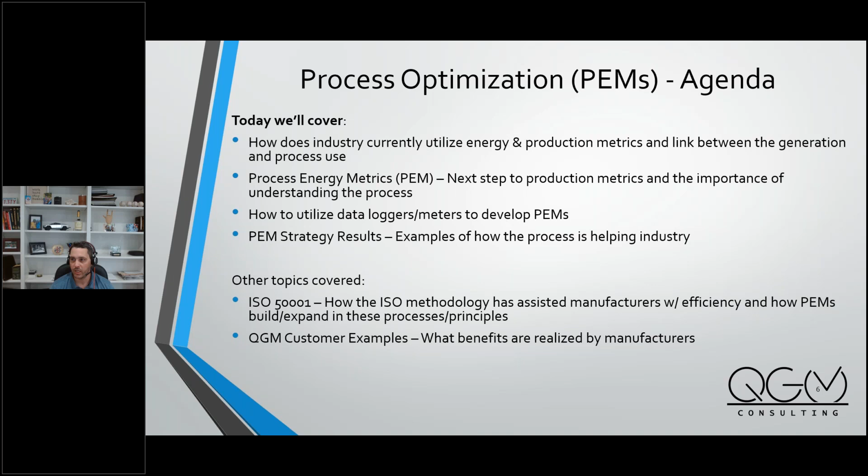So that's QGM, and now for a real brief agenda. How does the industry currently utilize energy and production metrics, and what's the general link between the generation of energy and the actual process use? We're going to really highlight the production or process energy metrics, we really feel it's the next step to optimize production and understand your process. And then, how do we utilize data loggers and meters to develop these PEMs? We'll go through a few examples, strategies and results that we've gone through over the past few years. A lot of these topics are closely related to ISO 50001, Justin's an expert in that, and we'll be able to see how ISO 50001 incorporates into the PEMs. So I'm going to kick it right over to Justin, he's going to dive in, and I'll be back a little bit later.

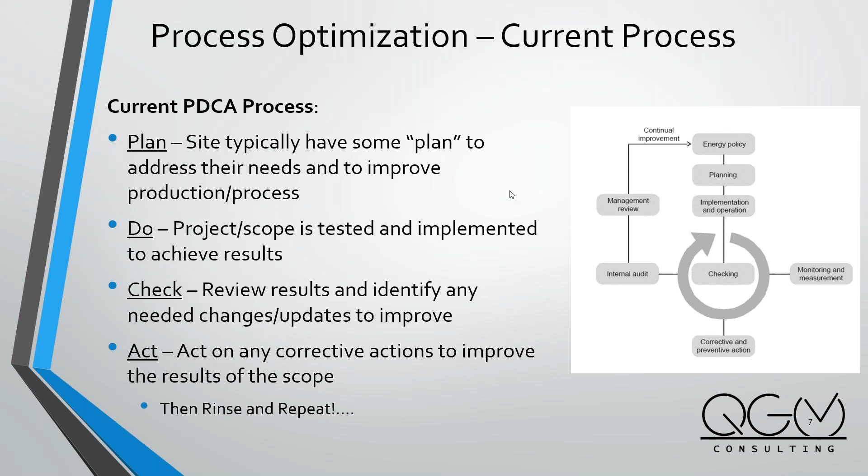So when we do planning, we want to have that do, check, act in mind. As we do that, the monitoring is critical. The quicker you can get feedback, the quicker you can analyze exactly what occurred, understand if there's any deficiencies, and go after those loose ends to make your process more effective, more efficient, more profitable.

To kick into what's typically happening now, sites will identify what we call significant energy users. A very good place to start. We try to figure out what is the most intensive operation, and a lot of that involves systems like boilers, chillers, compressed air, you name it.

But what we started finding out is, as we look at that high level building approach, the SEUs, or all these significant energy users, typically can touch many different processes. We wanted to dive into that more, and we found that we're getting a lot of traction as we go into this type of process.

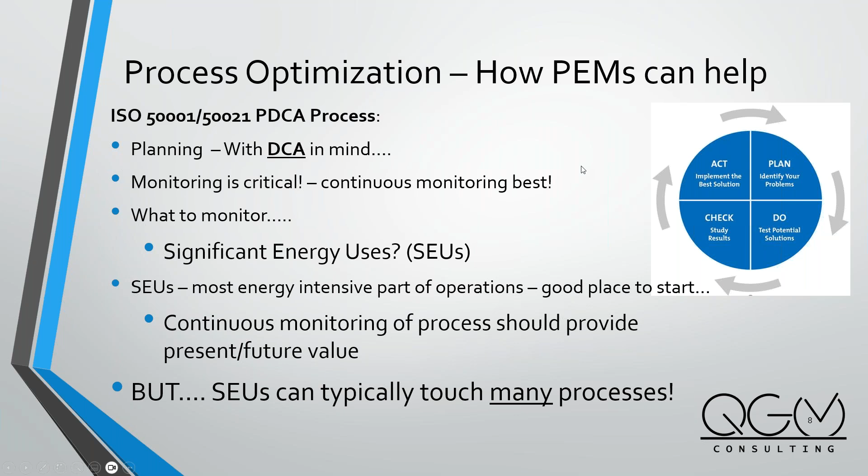So how does ISO 50001 play into this? Well, a lot of people are looking at that as a standard, essentially, to understand how to benchmark where they are, to show improvements and gains through an accredited organization, as ISO is involved in many other things with quality and that nature.

So what they've done is they have what they call energy performance indicators. A lot of times what we do is we normalize all energy to BTUs or whatever we may want to label them, and essentially start comparing them to production and other metrics.

But a lot of times what we've noticed is there are many different processes or widgets being made under the roof of some of these facilities, and we needed to get into more of a deep dive.

So as we went through with the efficiency goals, and understanding where folks wanted to go, typically it's a 5, 10, 15% reduction that people are looking to achieve year after year.

We started realizing that this energy performance indicator tool, although it's a great way to get started, there was more detail that folks wanted to get involved with. And as we got involved with those details, more results started coming and realizing themselves.

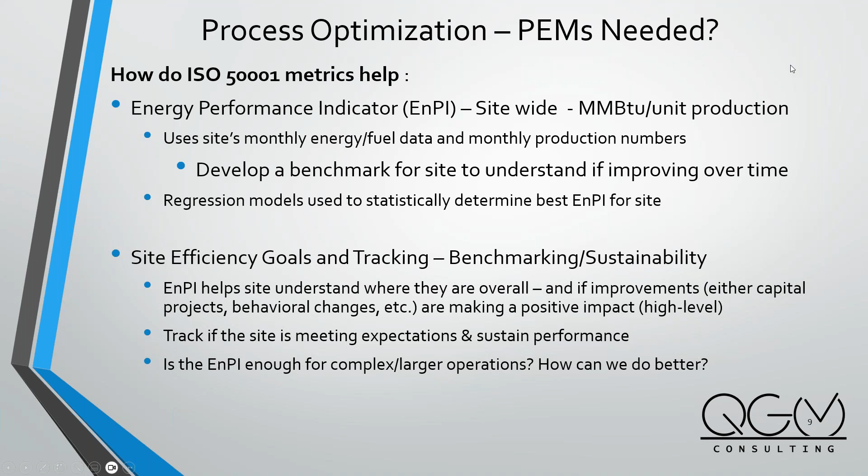So we wanted to say, how can we do better? And this is where we want to discuss some of the PEM stuff with you.

So again, this is just a quick look at the ENPI process tool. Just to go over it, not to beat a dead horse, but the concerns here were high level, not specific enough. Everyone can say, well, I bought a VFD air compressor, hey, the chiller's got a VFD, the pumps and all of that, we got some controls on it.

But what we found is what is actually happening as we make the widget. So this really only addressed generation, it doesn't really look at what's being utilized to change the form, fit, or function of any of these products.

As well, it takes time to develop and track these. It's basically on a monthly basis. And what happens is things could happen and you don't catch them for maybe a month or two.

So as we go through this, we started realizing with all of that happening, after two months you realize there may be a concern. There's so many variables now built into this tool that it was tough to really pinpoint where to get started to make additional improvements or correct some of the results that we were seeing.

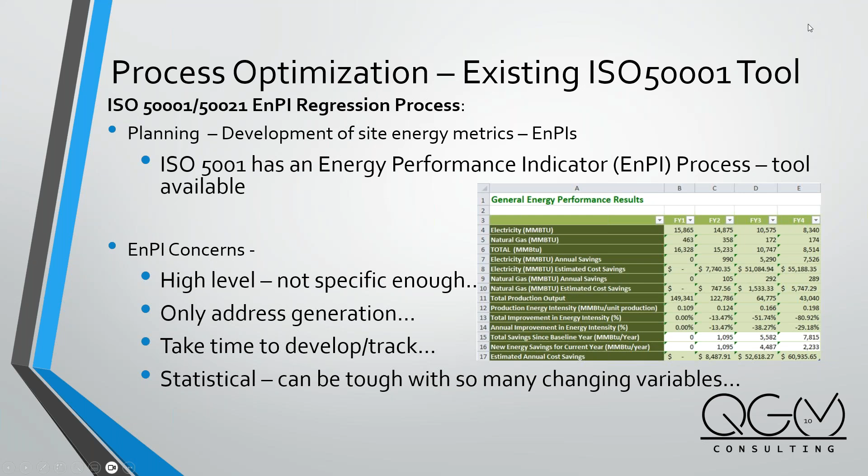So PEMs and EnPIs. Like I said, an energy performance indicator is something developed by ISO to talk about the entire site and how that site's energy relates to just quantity of widgets, could be pounds, could be linear foot of what they're making. You could slice and dice this many ways.

But what we learned is that we needed to get to that next step and look at what happens as we dive deep into an actual specific manufacturing line. So the next layer, after understanding the site and showing that we have some correlation, is to get more specific metrics related to the individual lines.

As we found, as we go around, sites typically do not understand the energy intensity for the products. That started becoming a question of what product is actually consuming the most as they go out for new contracts and things of that nature. They know labor and intensity of things, but what do these utilities actually mean to each product they make, and are they charging appropriately enough?

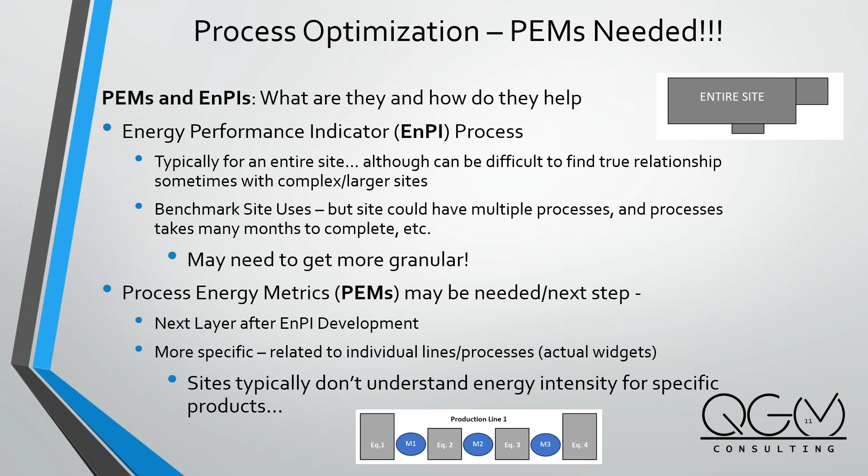So why are these PEMs needed? As we said, it's tough to track things. As you see, we have our general layout of site demand: you got some pumps, some chillers, fans, air compressors. It's easy to start measuring each one to go, hey, here's what this consumes with regards to your overall usage of the site.

And the pie chart has always been a great way for us to understand what's happening at a site, so that we spend our efforts where the energy is most intensive, and also not only where it's intensive, but where we can make the most impact.

So what ended up occurring was we started figuring out, let's get into—and I'll give credit to one of my old professors—he would always say, we got to know the gazintas and gazoutas. As an engineer, we like to create a boundary. What we would do is just draw a control volume around a production line: what is coming in for raw material, what comes out, and at the end of the day, what's going in.

So when we started getting into these, we understood this was valuable information. We've learned as we dive into understanding what's happening at specific lines, specific equipment, operations, and widgets being created, the conversation with the customer really took a different approach.

They really were engaged, meaning they look at a big air compressor and just go, I don't know, you tell me if it's working well. When you start telling them how much they're using for air, chilled water, to make each product, they start going, well, I'm not sure if that makes sense, or that's interesting—I didn't realize that was happening.

And before you know it, you're planting the seed to help people understand where there's intensity, and then whether it's jiving with what they would expect with regards to the process line they've ultimately been running for many different years at this point, right?

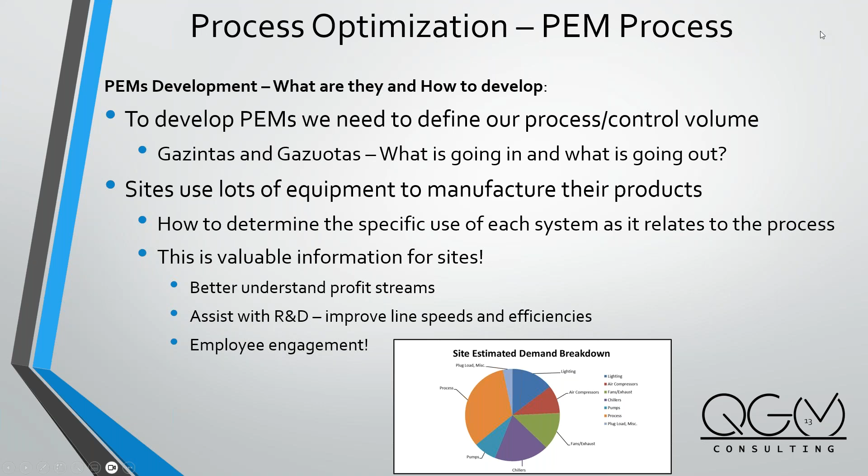So the gazintas and gazuotas, how do we actually approach, address, and go after this? As I spoke about on the other slide, we draw this control volume, let's draw the boundaries of this process line. We need to understand what is being consumed. Is there compressed air? There can be chilled water. Many motors, fans, pumps that either are inside the control volume or being fed outside the control volume, depends how you want to draw your dotted line.

There can be heat. We've got many other sources with direct fired equipment, steam. I mean, you name it, we've seen it. There's almost too much to list, but understanding what's being consumed will help us know the intensity.

Then we have to look at what's being produced. And that's been looked at many different ways with regards to either pounds of material, length of material, volume of material. As well, we can start getting into scrap and waste and other things.

And I'm sure, as you can realize, if we know how much energy is being consumed and how much is being made, we can put a value to what that scrap, what all of those inefficiencies are worth. And a lot of times that's what we use to talk with customers to say, is this enough of a carrot to help us go to the next step to actually make any changes and improvements?

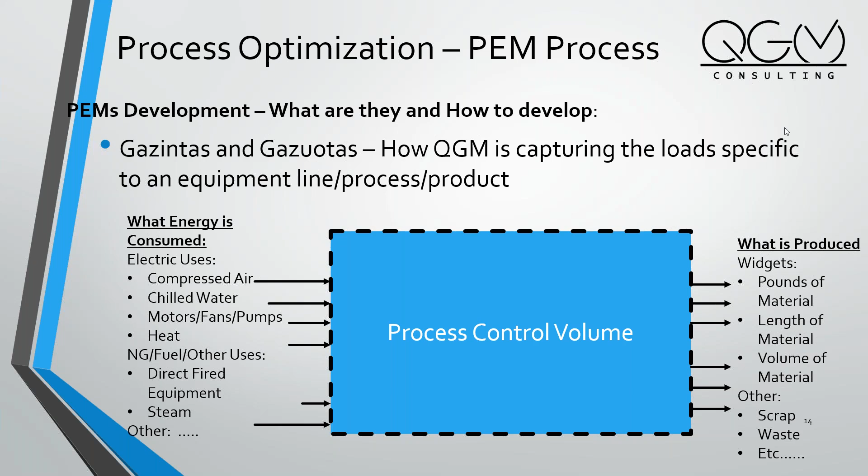All right, thanks Justin. I'm going to take over for a little bit here on the gazintas and how we collect the data. So first, what do we want to data log? What variables do we need to monitor? For how long do we need to monitor it? And what interval?

If you get a reading every 1 minute, a lot can change in a process in a minute, right? So that's the reason why we do like hobo loggers. They can go down to 1 second intervals for up to, I think, 3 months or more. So it's very important to understand those three criteria.

And then all the different types of monitoring equipment that we use is very broad. Whether it's just electricity, could be compressed airflow, straight power, pressure, temperature is big. So getting delta T's across a heat exchanger, for example. And we can utilize a lot of the hobo loggers and equipment to do this.

And I think that's why we've been successful, is we're very good at collecting the data and then presenting the data and letting the data speak for itself. Once customers see the data, it typically opens their eyes and says, oh wow, okay, let's work on that, or let's focus on this, or how can we make that better?

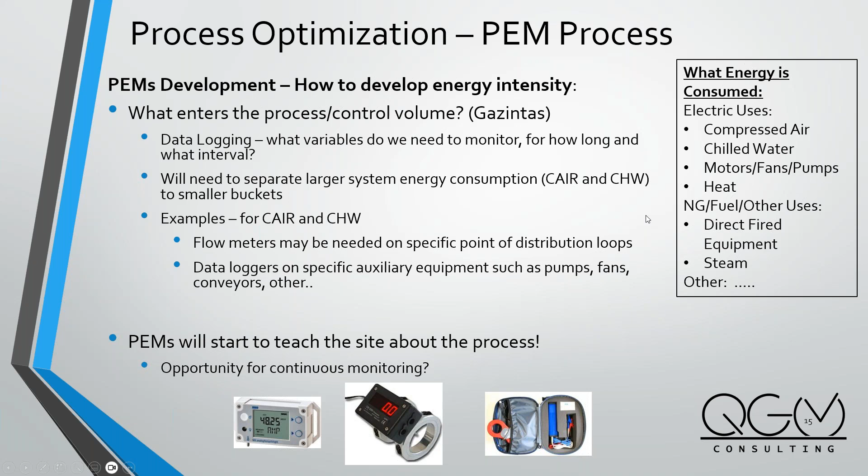So the gazintas is very important. Obviously, that's how we baseline the energy use, or the fuel, steam, all that. So here's some highlights of some of the data loggers we use from Hobo.

Like I said, what to monitor, how long. We like Hobo because it's easy to use, very easy to deploy. They have a nice software for analysis. And most recently, we've really enjoyed working with HoboLink, it's their cloud monitoring system.

So you simply need a gateway and an internet source, and then it can all go to the cloud, and you can see it near real time and actually download the data remotely. So we can do our auditing in almost half the time without going to the site. And this is part of the real time constant monitoring - you can make a change, look at the data, and see what happens.

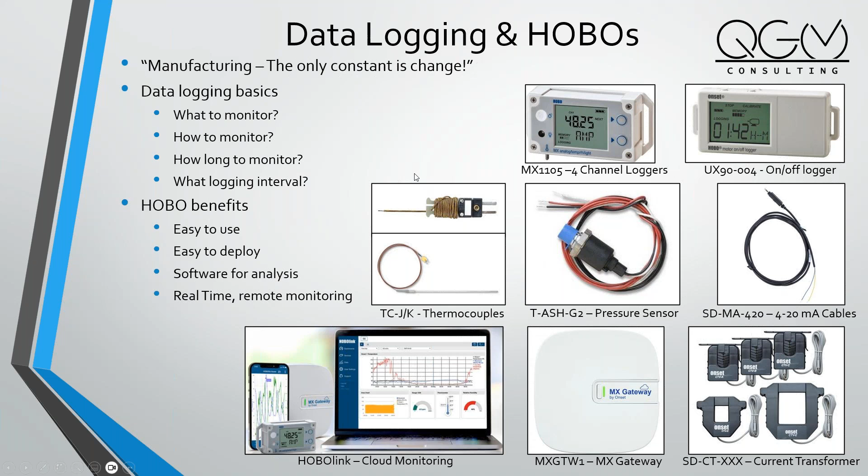I don't have to go through most of these, but we use motor on/off, pressure sensors, thermocouples, obviously current transformers, 4 to 20 milliamp output cables, and 0 to 5 volt is very useful on some applications, but there's a wide range that we can use.

So obviously, safety is key when you're installing these and it should be done by a licensed professional.

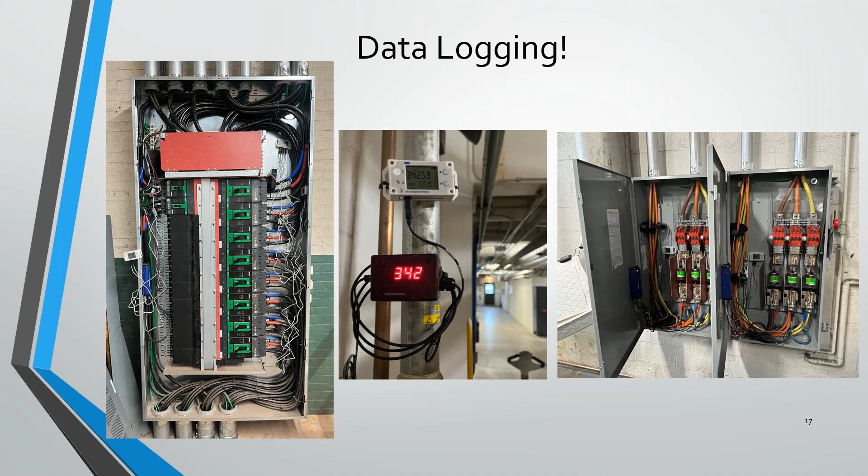So defining the widget is critical, obviously. That takes discussions with the facility, and this isn't some of the first items that we go over when we're in the plant. We don't say, hey, how much volume of metal do you guys make. This is after we've had some history with the customer - they trust us, we've been in there working with them, but they're more open to giving us some of their data.

So quantity, it could be jars, cases, bottles. Obviously, if you're a bottling plant, you know how many bottles you make, right? Volume of material, length. But defining that widget is critical, and it could be widgets per line, individual widgets. But that is all the first step.

Also important is scrap rates. Those consume energy and rework time, obviously. What other byproducts can come out of that? Is there a waste stream that you can sell for a byproduct? And then other energy losses - is there just significant waste heat going out the stack? Condensate going to drain where it's not being recovered?

So customers really were interested when we started monitoring the compressors and chillers, and they said, well, I wonder what line one is costing me for energy, because I really need to know for pricing, and I just want to know how much energy is going to that line. So we started looking at line one versus line two versus line three, and once we get the data, it's, oh, why does line one and line four use twice or three times more energy than line two? And maybe line two and three are newer processes and newer equipment.

So we're almost detectives, right? And we're trying to find out where the energy is going, why it's being used, and when, and if it could be improved, changed, or optimized.

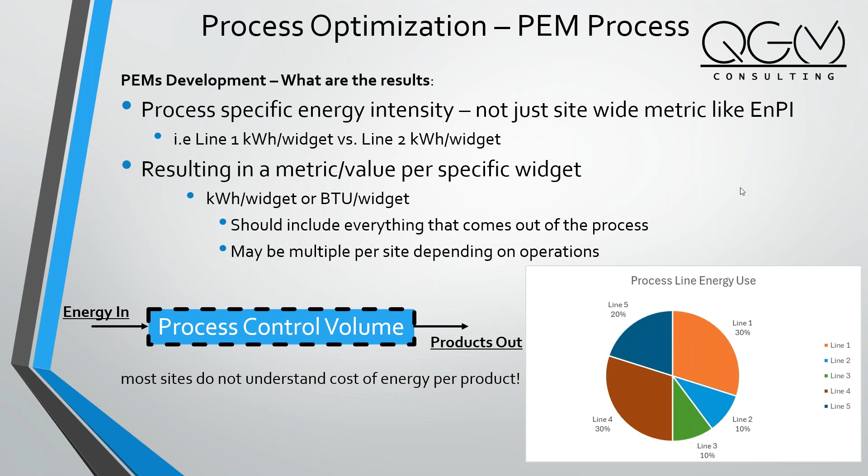And I'm going to kick it back to Justin for some examples. Oh, thanks, Alex. So, where have we been able to make some improvements? I'm sure everyone's a little curious. So as we go through, there's a variety of different ways.

I'm sure you can imagine no specific process is identical to another. Even if they make the same thing, I've been to plants that exist 15 minutes away from one another, making the same product, and it's different. If they were choosing to make it the same way, one would have overtaken the other, is what I kind of have come to the realization.

So you realize that everyone's got some sort of proprietariness to this. And as Alex said, part of this is gaining trust with the customer over years of relationships, of looking at the other systems and letting them know that the data is accurate, the data is real, the loggers work. How can we use these to help you out?

And a lot of times it comes down to an oh boy, oh no moment where, I don't know, something happened. We get a call and we come down. And this is an interesting example here where we started working with a new site, that literally brand new site.

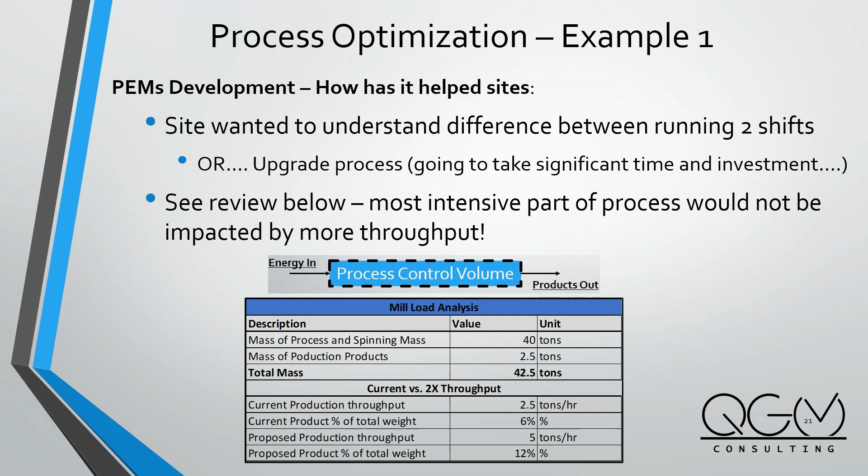So just to let everyone know, we had air compressor energy, big process motors, blowers, fans, dryers, you name it. Really what we see is the big intensive portion was the actual running of those process motors. We can see here we have the existing operation on the left, which is what they were getting done, and we have an energy intensity there of almost about 0.1 kWh per pound of product.

When we run additional hours, they could double how much they're making, but again they were at the same energy metric. So as we started looking, we said, well, what's the percent increase expected? The compressors, the blowers, the fans, they needed to all run significantly more, but they weren't really the main driver of this process. What was the main driver? Process motors. That's where it was only a 5% increase overall to actually achieve what they needed to.

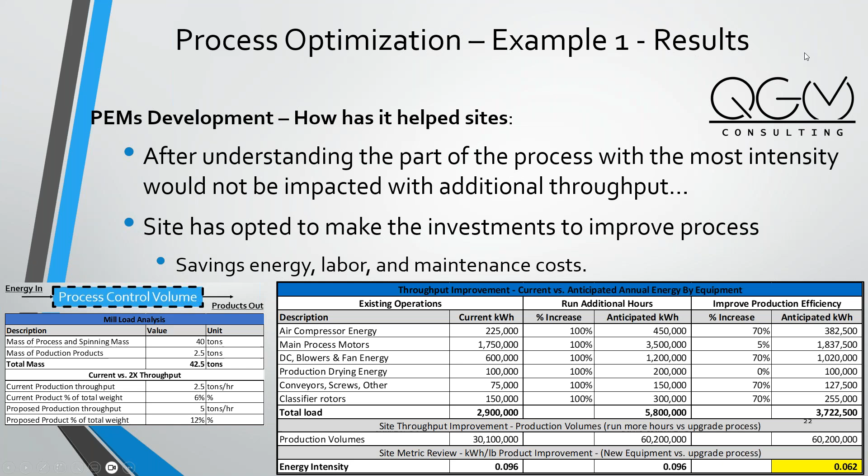As you can see, we were able to improve their metric by about 30% reduction. So they were able to make all of this product, not have to run 2 shifts, hire new staff, and all the other things that aren't even factored into this. And again, make huge gains as their industry was growing.

Some of the other things we've looked at — it's interesting, we went through this and got a few customers excited to potentially make changes. I will admit the insurance companies came and kind of put a stop to it due to concerns with electric heaters.

But we had a lot of customers that use steam to heat water tanks, and this was basically specific to the plating industry. As we went in, we realized we're running lots of boilers, and we've got a lot of lines that need to be heated. Whether they need to be heated all the time is a different thing.

I'm sure you've seen on-demand hot water heaters, things of that nature. They essentially are better because they only use energy when they need to. When you get these big central systems, we're sending steam and everything everywhere, whether you need to or not. And that's kind of standard in industry, right?

So we looked at the difference between steam versus electric plating. As you can see on the left, we had just about 50 tanks, and when we look, the tanks are in operation a majority of the time for their single shift.

And we were able to figure out the BTU per tank per hour - essentially what the boilers feeding these lines were using, accounting for the lines and everything. They did have some electrically heated tanks as well, so we ran an analysis to understand it.

This one was interesting because there's slightly a cost increase to operating with electric heating. But what we learned is the BTUs really drop down - we almost cut them by 75 to 80%. Obviously electric cost per BTU can be 3-4x that of natural gas in some cases, so even with the efficiency we saw, you're seeing similar costs to operate the lines.

But when we look at the MMBTU savings, and especially the metric tons of CO2 that could have been saved, it was very much a driver and would be a driver for a number of customers.

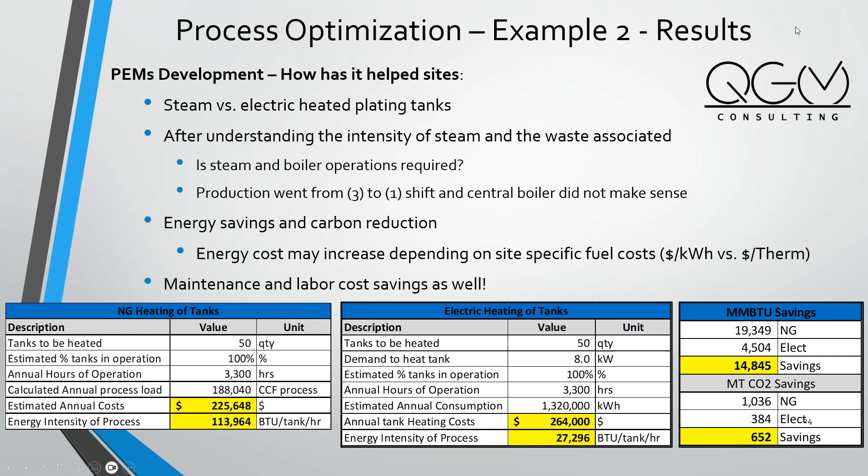I'll be transparent and admit what we found is that insurance companies were not too keen on having these electric heaters, as a number of plants have burnt down because of tanks basically being overheated - the water drains out and you get this element running that starts melting things and creates a hazard. Even with safeties, automatic fillers, and floats, we found viable solutions, but at the end of the day no one's willing to go against the insurance company. So I don't expect this to never come to light - I assume someone will find a better way to get it done. But for now, the insurance companies are the ones stopping those projects from moving forward, interesting enough.

So a third example, and this is a really big gain we helped one of our customers make. We've seen this at a number of different plants - this plant was actually willing to act and try to make the changes.

Again, we see these big horsepower boilers, 1,000+ horsepower, feeding tens of thousands of feet of steam piping that in some cases literally end up nowhere. Processes back in the day would just tap in and keep using more and more steam, creating this vast spider web network of steam distribution. And it doesn't matter how often you insulate or take advantage of it,

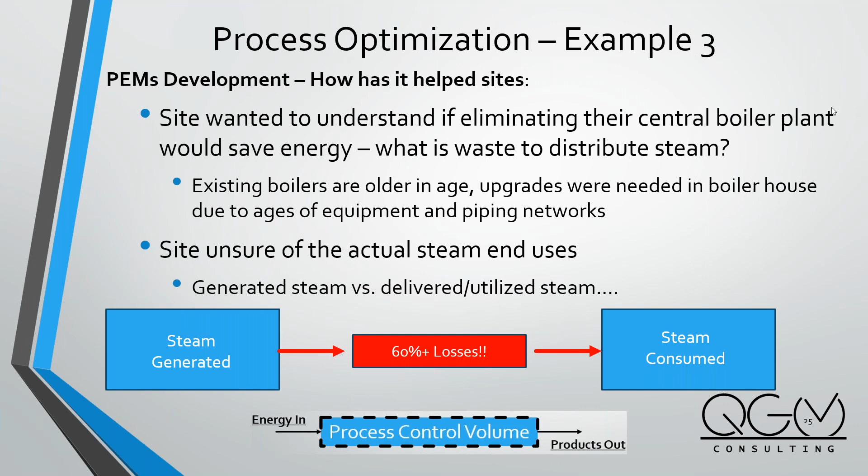it's basically a waste. What we were able to do is some savvy data logging with HOBO loggers on some condensate stations, and strategically repiping some things to really make sure we understood what we were going after. We worked to figure out what the boiler was using versus what the process was using.

And we found there were 60% losses essentially from the whole entire system. With the data loggers, we were able to trace where the natural gas was going - there was some heating, some process, and as you can see, the process was only 10% of the total usage. The rest of the energy was going to cooling, distribution, things like that. And you may say steam for cooling - well yeah, they had steam, so they just used absorbers and things of that nature, which made it even worse.

We were running these big boilers for really no reason. So instead of running thousands of horsepower of boiler, we got it down to about 530 horsepower systems essentially sitting around the plant feeding the specific lines. All the office heating and production heating went to direct fired style units fed by a natural gas line, which allowed us to only use energy when we needed to. They ended up saving 50% of their actual total gas use, which was a lot, as you can imagine, coming from a 1,000 horsepower system.

So other examples, like we said, involve reviewing these central systems - do they make sense? A lot of times we're finding there are better ways to allocate energy end uses so we can shut them off when needed. Back in the day we had more booming 2-3 shift operations, and this isn't meant to shut things off for 4-6 hours at a time, but on weekends. Some of these metrics actually force our customers to understand how they're going to process workflow.

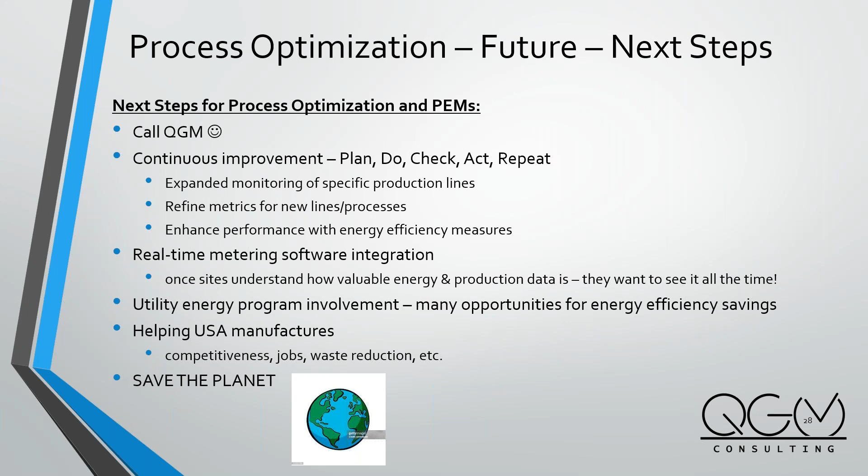Like I was saying, utilities specifically in the New England region have great programs, and there are many more across the United States, and this data logging allows you to identify many opportunities for energy efficiency and savings. We love it. It's helping the USA manufacturers. It's adding competitiveness, jobs, and reducing waste, and we're saving the planet, right? So that's what we're all here for, right?

So some conclusions, key takeaways. For larger sites, more intricate processes, we may require an additional review after the ISO 50001 significant energy users in the ENPI process, and that's where PEMS can come in. Again, this is new, and we're just starting to develop this with customers, but we're excited to be working on this right now.

It really gets the customers engaged and educates them on how much the process is using for energy. And it's important, so by helping the sites better understand the energy intensity, they become more aware, engaged, and it's a win-win overall.

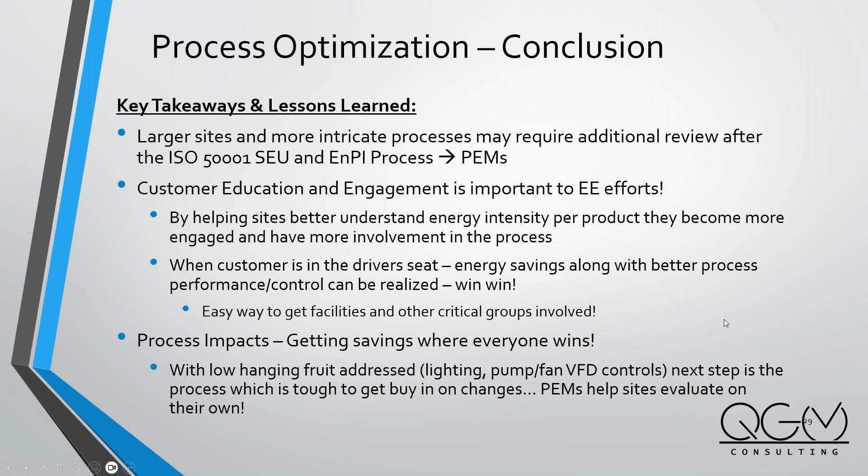Production and manufacturing really is, they're there to make a product, right? So whenever you can optimize how much product is getting out the door for cheaper, typically customers are on board. And this is really the start of it, because PEMS really help evaluate what that is.

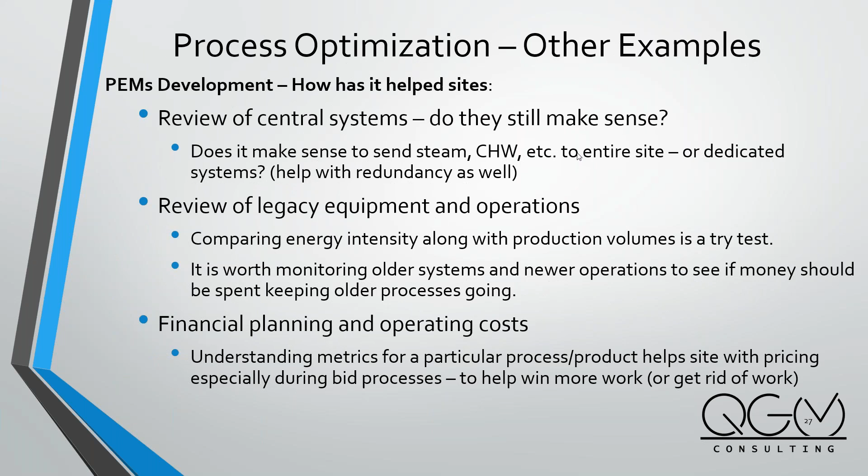Case study 3. There was a question: which Hobo data logger types and models were deployed? So Justin, that was the big steam plant, 1,000 horsepower of natural gas boilers. I know there was a lot of loggers deployed, if you want to go through a few of those.

To be honest with you, it's not even the data loggers at the end of the day that prove out the concept, which is great. It was actually a lot of legwork—one-line diagram tracing, understanding where the networks went, understanding where we had some steam pipes.

I've seen this worse in other facilities—quarter-mile long steam pipes that literally don't go anywhere, 10-inch in size and things of that nature. As you're walking around, we had a savvy customer who would go turn off steam valves going to these dead networks, and he would say, I noticed my 1,000 horsepower boiler react to this valve.

As you traced it out further and further, we got down to the specific equipment level, using various Hobo data loggers—from standard on-offs to actually capturing loads on pumps, understanding where their curves were, returning condensate, and working with the site engineers themselves. They wanted data loggers placed in certain locations to prove out their assumptions and make sure they were comfortable with any changes we were going to propose or make.